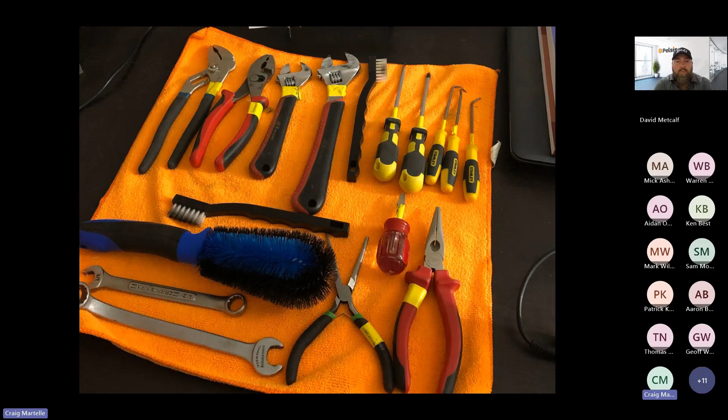It sounds kind of weird, but if you have somebody there and you start talking, you might lose or misplace parts and pieces, and not realize you may be putting a used piece back on there. So have them separate, put them on a towel, they're not going to roll away. When you're done, you should have no parts left on that towel. If you've got 2 or 3 springs laying there, something's not going to work right for you because you forgot to put them back in. So please make sure that you use a towel and put all your parts on there.

When you are cleaning your equipment and doing any mechanical work, please make sure you're wearing gloves. With having the gloves on, as any label will tell you, when you are operating equipment you need to be wearing gloves for application. That goes for doing chemical tank repairs too, because you're going to be touching parts that do have chemical on them.

Routine care and maintenance: don't leave insecticide in the tank for any long period of time. What's a long period of time? Believe it or not, just a weekend. Think about the chemical you're putting in there. What are you doing when you put chemical in with the water? You're creating a suspension. That chemical wants to adhere to the walls and to the voids and wait for the water to evaporate, so that your chemical is doing its job, waiting for the pest to come across it, walk through it, get a lethal dose, and die.

It will actually start separating, going to the walls of the sprayer the same way. And if you don't keep the chemical agitated in there, you could wind up having it get really solid and crystallize along the walls. That's going to create problems for you, because once it goes to a crystallized mode, it will not go back into solution. So if it breaks apart, it's going to get sucked up into the siphon tube, which will create problems getting the chemical to come out and work well for you.

If you're going to be changing your insecticides, of course you rinse your tank thoroughly between insecticide formulations so you're not doing any cross-contamination.

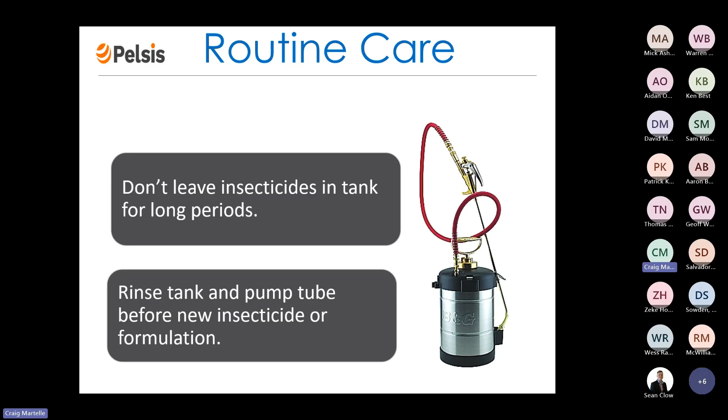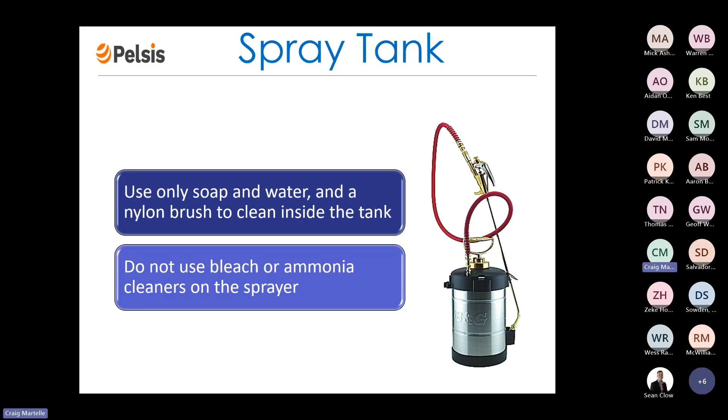Only use soap and water and a nylon brush to clean the inside of the tank, and there's good reason for that. If you use bleach or ammonia, bleach will actually etch the surface of the stainless steel sprayer, and ammonia will react against the brass parts over time, creating problems with those parts. So you'd want to keep those parts working properly—lukewarm water and a little bit of dish soap will work exceptionally well for you.

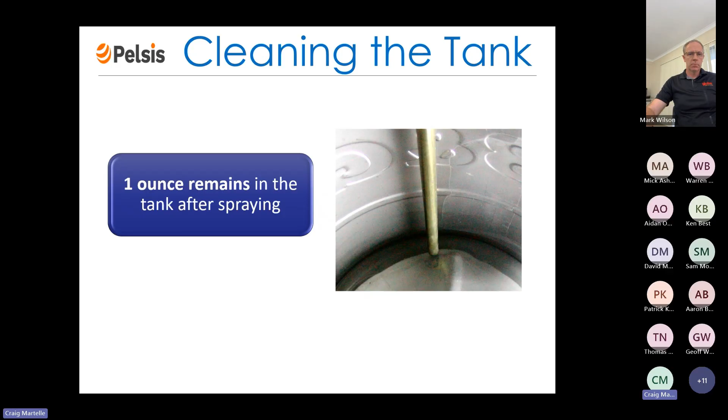When you clean the bottom of your sprayer, you're going to wind up with some water in that corner. What you want to do is have the proper brush to get in there to make sure you get all the particles out of those corners or that edge around the bottom of the tank. A long wire handle, but plastic or poly bristled brush is great. The reason I like to have the metal handles...

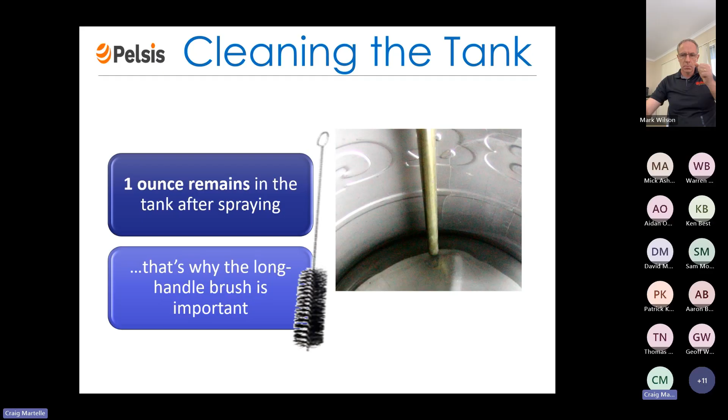When you're in there cleaning around the bottom, what you want to do first and foremost is make sure you don't go too hard against the siphon tube. If you do, you could bend it. One of two things will happen: one, you won't be able to get all the chemical solution out of the tank, it'll raise it up too far and you'll have too much sitting on the bottom. Two, you could crack the top of the siphon tube, and if the crack is big enough, it's just going to suck air out of the top of the tank instead of taking up the whole solution. So you'll have to take it apart, rebuild it, get that siphon tube out, and put a correct one in. That will help it work for you.

Once you have mixed your chemical in there, what do we normally do? We take the sprayer and shake it. Well, we're actually creating a little bit of foam on the top, and that foam starts adhering to the underside of the top of the tank. If we don't get that cleaned off, it'll start drying there and crystallizing. Over time, that crystallized material will start breaking off and fall to the bottom of the tank. What'll happen is it gets stuck in the siphon tube, or as it's going through, it'll start clogging your filter at the handle. So make sure you're properly cleaning the bottom of the tank as well as the underside of the top, and that will work exceptionally well for you.

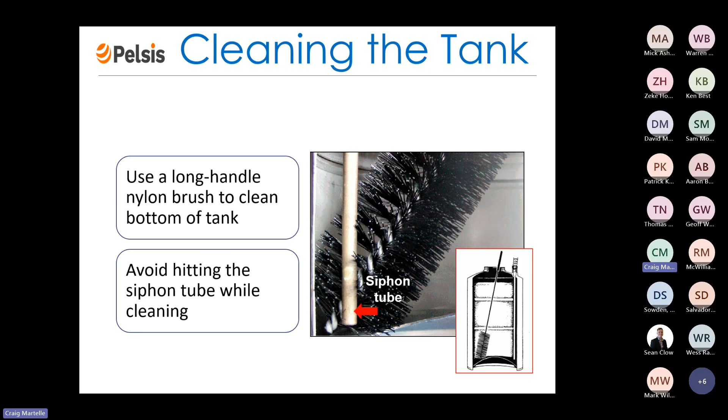But again, please avoid hitting the siphon tube, because you do not want to crack the top of that and have a problem.

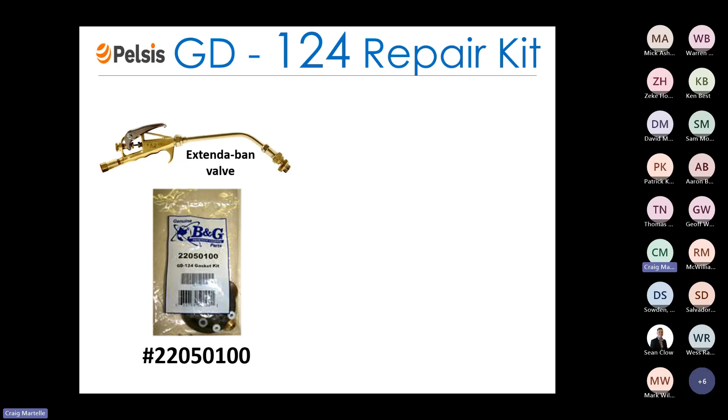Now, we do have a kit here for the full extension handle. I understand most of you don't use the cable inside, but we do have a kit available that has the parts inside that make it work well for you.

Now, with these parts, a couple of items: the springs are something that's kind of important. You want to make sure you keep those springs updated and working very well for you. You need to repair your kit about twice a year if you're using a lot of chemical, but I recommend a minimum of once a year. When you take the used spring out and put it next to a brand new one, you'll notice the new one is about a third taller. There's a lot of pressure that causes it to start shrinking down, and it will lose the spring aspect and become less effective, so it won't shut off on a regular basis.

But your soft seat gasket needs to be checked on a regular basis. Your check valve, your pump tube, the packing washers—they start leaking, you've got to replace all of them. We're going to talk about that as we go forward here.

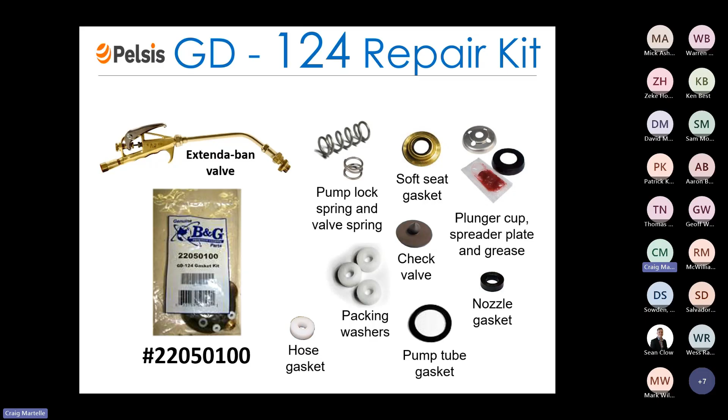On your pumping mechanism, the pump gasket is at the top of the tube. That holds the pressure in the tank itself. It's a very simple seal. All you need to do when you put that top on is get it snugged and tighten it just a hair—you don't keep turning it forever. If you do, you're going to start causing damage to the gasket. It's either going to crush it too thin so it won't hold air at some point, or, since it's a layered type gasket, if you go too far you could kink it and create a void, so it won't hold all the air pressure and it'll cause you a problem down the road.

Your check valve is at the bottom—you need to check that quite often. There's a very small hole at the top of the pump handle right in here, an air hole that allows excess air to get down in.

If you happen to have any small particles in the area, they could go down through, get past the plunger cup, and wind up stuck in this gasket. So make sure that you check that in the bottom and make sure that check valve is perfectly smooth. If there happens to be something there, very carefully peel it down, take that whatever material is stuck in there, and it should seal right back up for you.

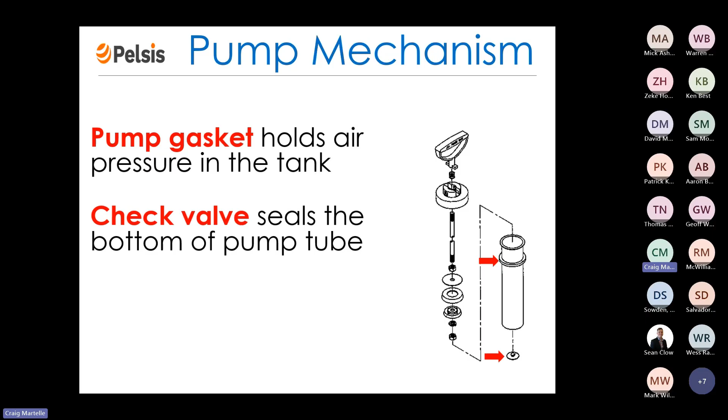But be very careful, because the brass on the bottom is very soft metal. Don't get in there with a hard piece of metal and start digging around.

Strokes of the plunger cup, they are constantly going around, so you have to check that on a regular basis as well. Make sure that you have no problems with it. If it starts to get dry, put a little bit of grease on there. Now, when you do get your kit, there is a little package of grease that's in there. There's enough grease to grease that plunger cup at least twice, maybe even three times. So make sure that you have the proper material there, so you can get the right amount of grease in there. It's going to hold air and allow that to slide up and down with ease. You just want to make sure that you're taking care of it properly.

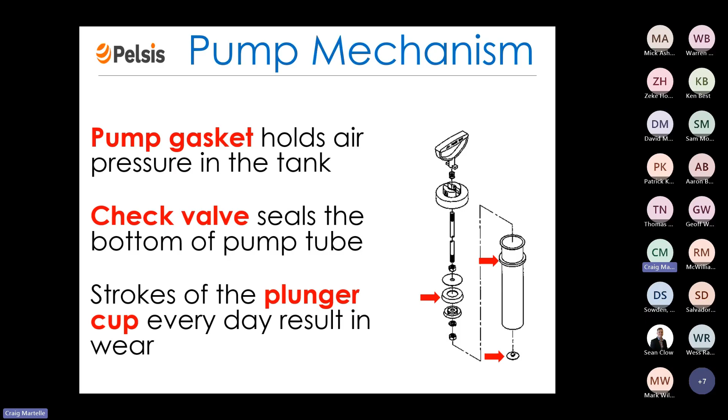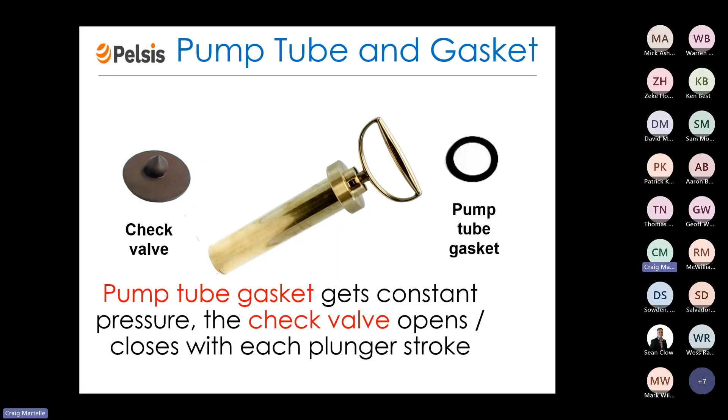Pump gasket, check valve. They are used all the time as you're opening and closing the pump tube. You're causing some pressure onto that pump tube gasket, but then the check valve, every time you're pumping, you're causing an action there. That action is wearing it out, and over time it will wear down the check valve, and you want to keep a good eye on it to make sure that it's not cupping the wrong direction. And if it starts to cup the other direction, you want to replace it as soon as you can.

If you start having some little issues, or you're losing a little bit of air pressure, and you've already changed your gaskets on the top of the plunger tube, take it out, go in the sunshine, and slowly turn that tube. You'll find a very fine hairline crack very, very quickly in the sunshine. And if that is the case, just replace the plunger tube. Now, we do make a stainless steel one. If you're concerned about it happening again, just replace it with a stainless steel plunger tube, and that'll take care of that issue.

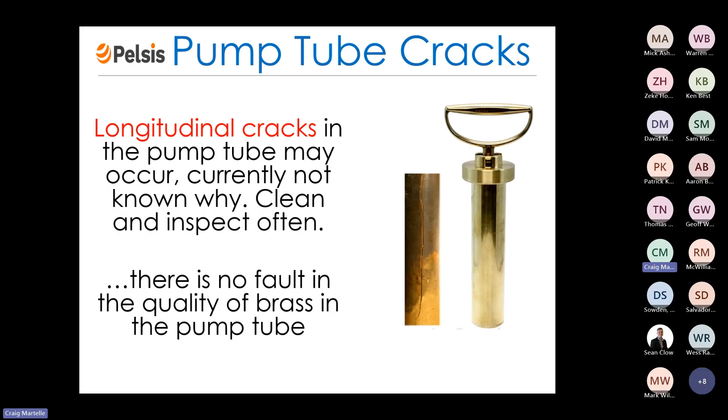The plunger tube, the brass tubes are made with the same material. That's the recipe we've used forever since this unit has been manufactured. It is a chemical resistant brass, and it holds up against solvents and insecticides.

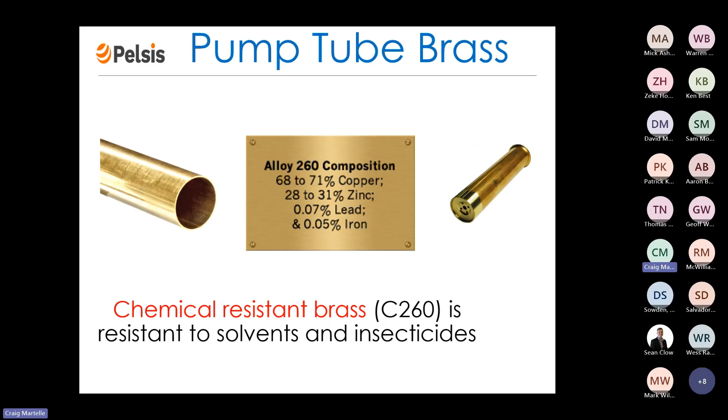Replace your pump tube gasket when it's cracked or swollen. And if you look at it closely, it's kind of porous in there. And if you really tighten it too hard, you will create that to move, and it'll create a little bit of a kink, and it'll raise or lower parts of that, and it will create a situation where it's not going to seal up that air from getting in or out. So you want to make sure you keep this looking very well. And if it starts to swell up for any reason, replace it immediately.

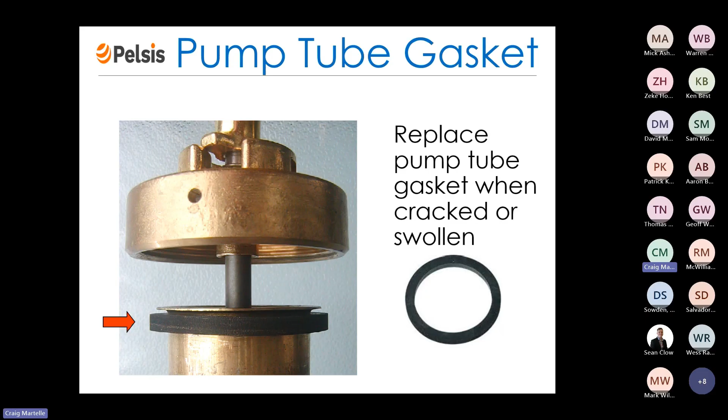Check valve. Check valve is a neat little piece. It is not the easiest thing in the world to get back on, but you can get it back on. It takes a little bit of pressure to go on there, but I want to really stress one thing here.

How that tube is manufactured, that bottom plate is pushed into the tube and it's brazed together. If you happen to catch the edge of that plunger tube on the edge of a tailgate of a truck or the side of a van door as you're trying to do your chemical, if you hit it too hard, you could actually cause the braze along that area to crack. And if that does crack, you could at some point have leakage of liquid getting back into the plunger tube, and then hence giving you some problems with chemical coming out the top.

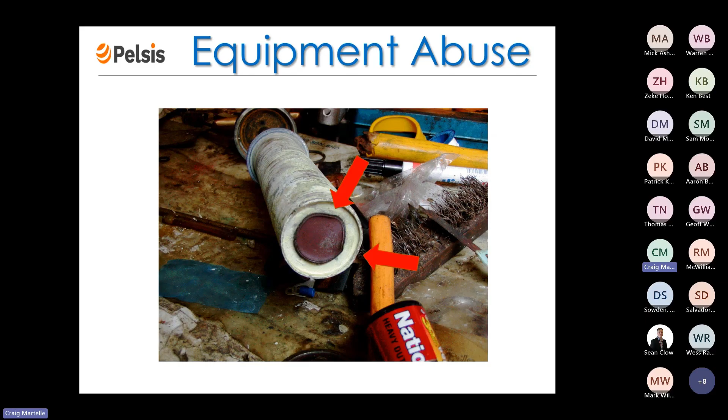But if you look carefully on the underside of the cap, where the handle is, there's rusting, surface rust that is built up in there. That will sometimes break off and go down through the plunger cup and come out the bottom and get stuck in the bottom seal. What you want to try to do is look at it every time you're in there. Always clean that down. Just brush it down, and what it does is take any extra particles that are there and cleans them off. That is part of the cleaning and maintenance that you need to do on a regular basis. So please, when you clean it, clean the underside of that, and it'll work out very well for you.

The plunger cup, technically you can replace it every 2 years, but if you happen to get the kit that we put together - I believe the folks, Mark, you said you folks had a kit that you're putting together - if this is in there and it's got the cup and it's got the pressure plate in there, if you're taking that all apart, don't put the used one back on. The new one's there, just put it back on. But what you want to do is take like a Ziploc baggie and put the plunger cup and that plate in it.

Date it, and put it in the glove box of your vehicle. This way, if it's got a little bit of grease on there, it's in a sealed bag, it'll still be protected. That way, if you happen to take this apart and you're out in the field working somewhere, and for some reason you happen to drop this and it cracks that plunger cup, you'll have one in the vehicle that can get you through the rest of the day. Otherwise, depending on how far you are from the office, you might be done for the day. You don't want to do that.

So just keep one in the glove box, and every time you replenish the one that's in the tube, take out the one in the glove box, throw it out, put the one that you just replaced into another baggie and put it in the glove box. That should help out with any type of field repairs you need to do.

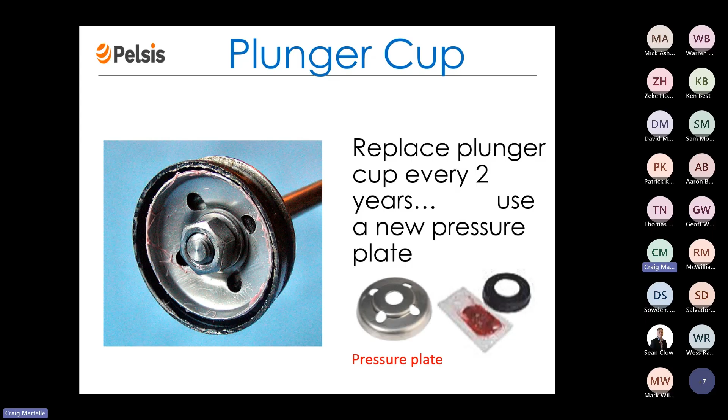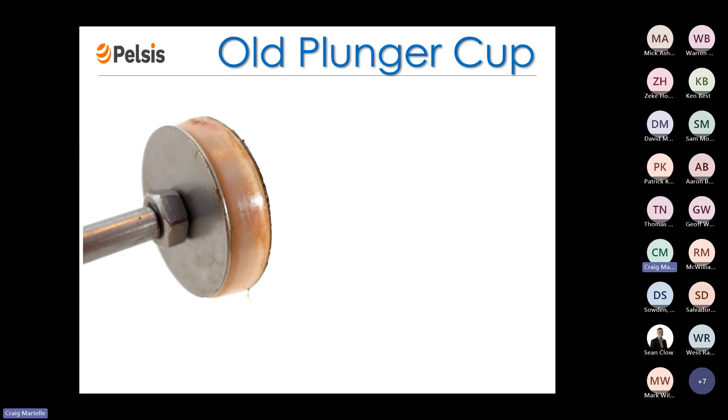If you happen to have an older unit and it has this semi-transparent plunger cup, please throw it out, get a new one. We haven't had those in like 9 or 10 years. And if they are working, they're probably not working very well. You're pumping like mad, just not getting a lot of really good pressure. That's part of the issue that you have there.

Replace the pump lock spring. Now, how do you tell if that's giving you a problem? If you have that locked in place and you're going around spraying and you happen to catch a piece of a rack or something in a warehouse, and all of a sudden your spray tank just drops to the end of that rod real fast, well, that's telling you that spring is not working properly. You need to replace it. It's just lost its spring. It's just been crushed down too much.

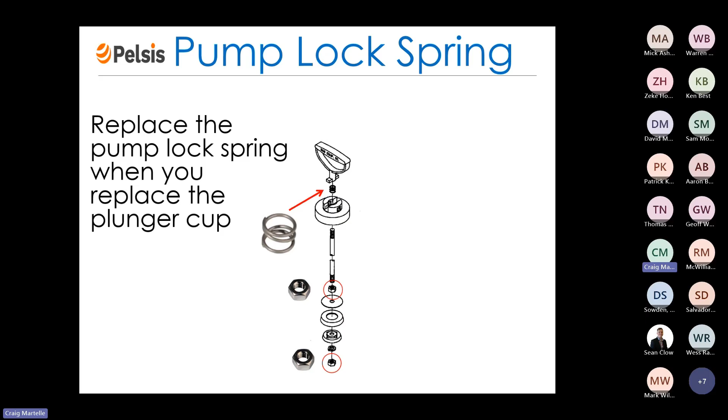So what you do to replace it is you take the bottom nut off, take the cup plate off, the plunger cup, and as you're going up through, take the top nut off. This will all slide straight up. Take the old spring off, put the new one on, and reverse what you've done. Put the top nut on, then put a new plunger cup and plunger plate on there, and tighten everything back down. You're good to go.

Now the tube that comes with that of grease, grease it up to make sure it's going to work well for you. Just run it around the inside of the top of the tube, and that'll give you enough grease. There's enough in that tube to grease it at least twice, as I said, so don't throw that out or throw it all in there at one time. You'll just wind up with a whole bunch of a glop mess at the bottom of the tube, and it's just not helping you out.

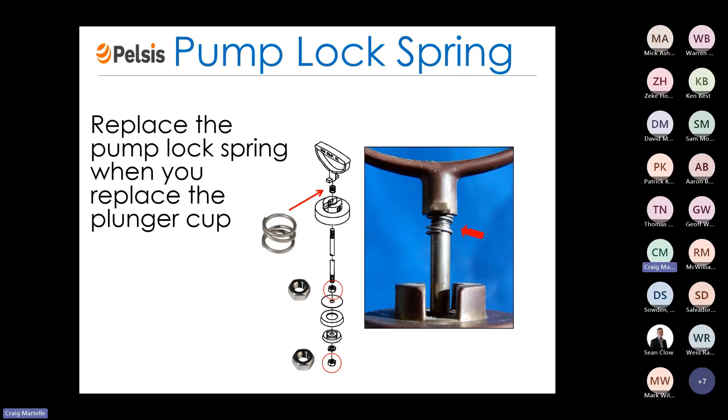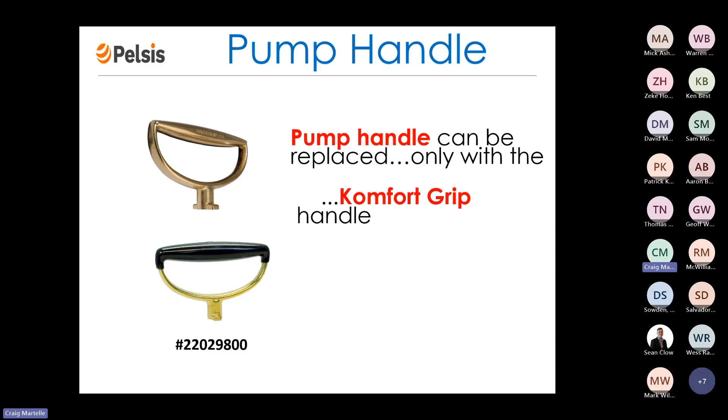If you happen to break the handle, we do replace it. It does come as a Komfort Grip handle on the replacement. But occasionally you may need to replace it. If you do, just order it, get it replaced, and move forward.

But your tank hose, this is one area that unfortunately I see a lot of folks that just don't take the proper time to repair or replace. If your hose happens to have any type of a crack, or if it's damaged, or if the outer casing is just that worn, you're starting to see the corded thread underneath, please replace it.

Because as you pump that up, when it's fully pumped up, you've got around 30, 35 PSI in there. If that hose happens to break on you, how fast can you take that pressure off? And if it's not that quick and you're on somebody's hardwood floor over top of an oriental rug and it soaks it, you've now got a contaminated surface you're going to have to deal with. So check it on a regular basis, and if you need to, please just change it.

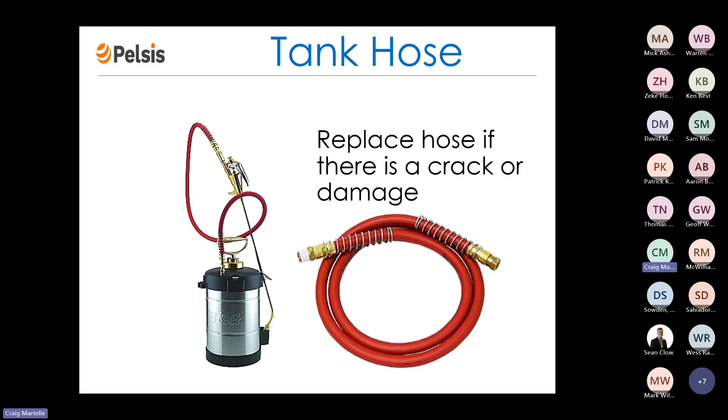If you're using a no extension or a 9-inch extension, you're going to have some extra hose. Just coil it around the top of the handle as you have it in the back of your vehicle. That way, if there's anything in there that happens to be rattling around, it's not going to go against the hose against the side of the tank and create some type of a fracture or crack in it.

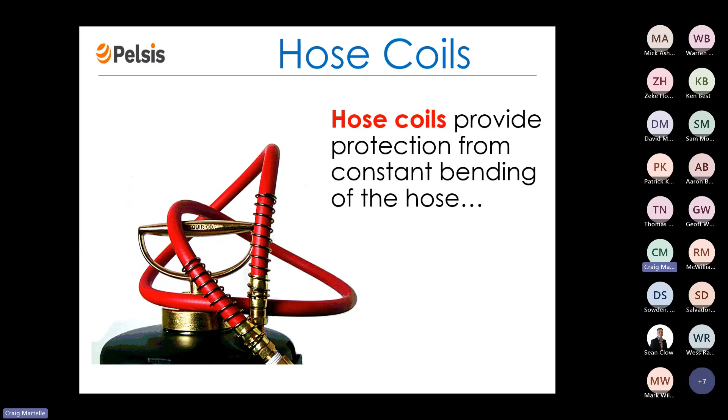Or better yet, if you happen to have a 5-gallon pail, just put your sprayer in that pail. That way, if there is something that does leak, it'll leak into the bucket, not all over the back of the truck or out on the ground. It's the last thing you need to have happen.

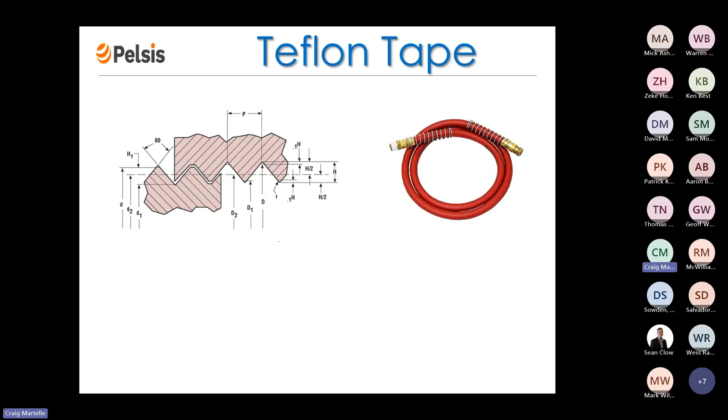When you do replace it, make sure you use Teflon tape. That will take up the little bit of room that's in the threads. Brass is a good material. It is a little softer. It does move, but it could create a void in there. So a little bit of thread tape will help take up any of that area.

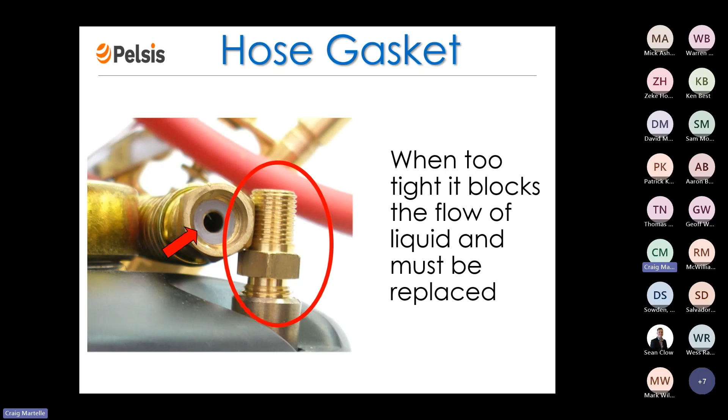When it comes time to replace the gasket that's at the bottom of the hose, yes, there is one there. Yes, it does need to be replaced. You need to take that double male studded thread and use 2 wrenches on that and the hose, or you're going to create a problem.

You put a wrench at the bottom where the red circle is. While you're holding that in place, the wrench on the top for the hose, you crank it to your hand, and that's how you tighten it down. How tight do you make it?

When that hose is out, you think that's a swivel piece that's on there. Technically, it's swiveled there, but it is not supposed to swivel. Once you tighten it down, it completes the connection and holds it tight in place. You tighten it just enough to where you can't turn that hose. You are now tight enough.

Don't go any tighter. Now, if you only use 1 wrench there, what's going to happen as you're tightening the hose, that stud is going to slowly turn a little bit each time you turn the hose. Eventually, you'll start stripping out the brass threads on the steel, and/or you will shear off the siphon tube. You'll all of a sudden hear a clink inside the tank. And if that happens, well, you just over-tightened it. Now you've got to go get a siphon tube and put it in.

Please use a second wrench, put it on the base or on that double male stud, hold it tight and tighten to the wrench or break away from the wrench. That is the way to make this work without causing any further damage.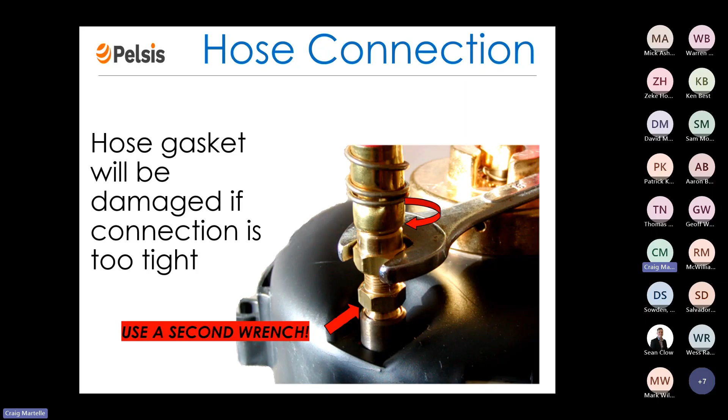When it comes time to check your screens, and hopefully you're checking them on a regular basis, if you're using wettable powder, I recommend that you check them at the end of every day. If you're using an EC, once a week. You just want to make sure there's nothing building up in there.

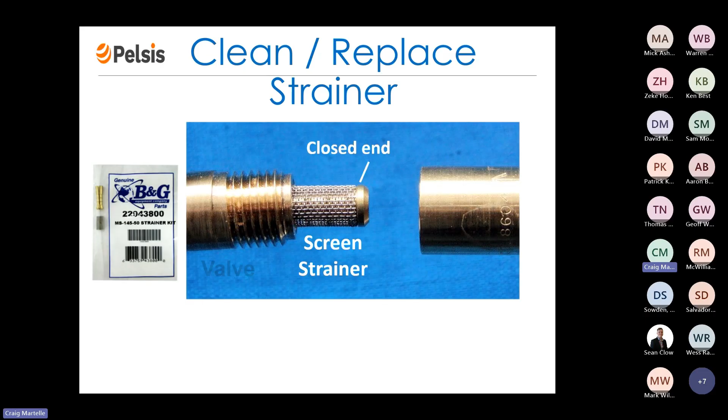But when you do put it on there, there's the closed end that needs to go towards the hose. Now it is beveled as material comes down through. Sometimes you have, looks like frog's eggs. Sometimes it'll start solidifying, and as that hits that beveled top, it breaks it up and it goes through the screen.

It comes out the end. Now, if you happen to turn it the other way and put the closed end in towards the valve, you've got it pumped up and you squeeze the handle, it's just going to shove that into the handle. It's going to shut off your flow, and you'll need needle nose pliers to make sure you can get it out. But it will stick it right up in the handle.

I've been doing pest control 40 years. I did a rebuild class about a month ago. So if you're talking with somebody, it's very easy to switch that the wrong direction. You just got to make sure you have the proper tools so you can get it out so you don't cause further damage.

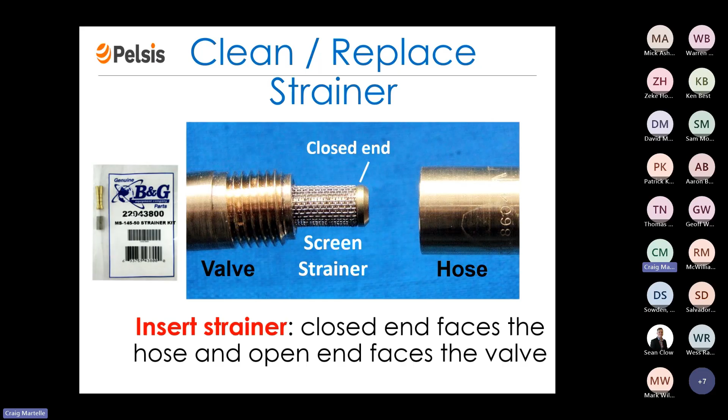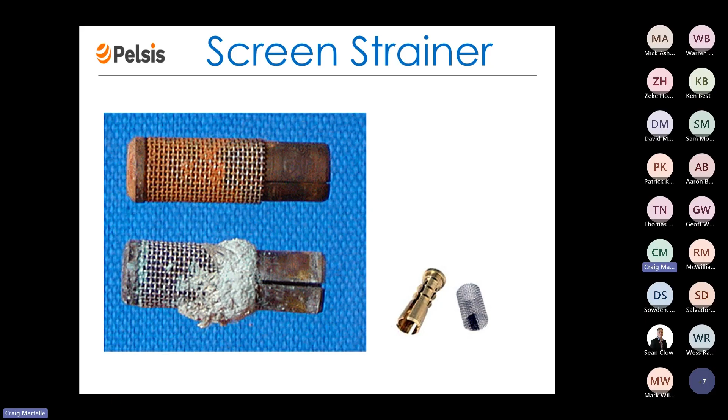On the one on the top, just clean it, and if you need to, there are parts available. Replace it as needed. But please don't take it out and just go without it. What'll happen is you'll start clogging the tips very quickly. That screen is there to make sure that you don't clog your tips.

When you do clean it, please use a nylon bristled brush. Now, some of you are using the full length with a cable in it, but I believe most of you are not. So in the handle, we're going to talk about the parts that are here in this handle, and then the parts that shut off in the end.

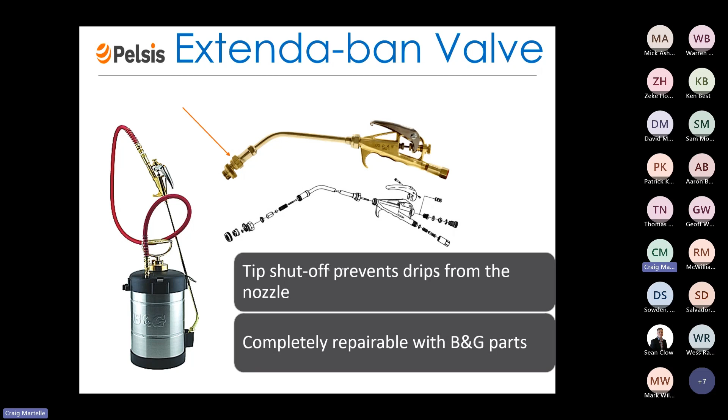And then I'm going to show you the handle that you folks are using, so there is a difference. We just want you to understand it. If you happen to have a little bit of leaking and your gloves are getting wet, that stainless steel nut there, only turn it a quarter turn to shut off the leaking. If it still continues to leak, stop at that point. Something's not right. You want to take it apart.

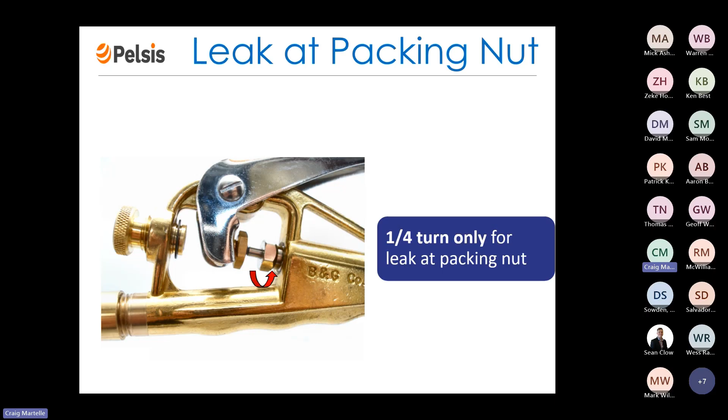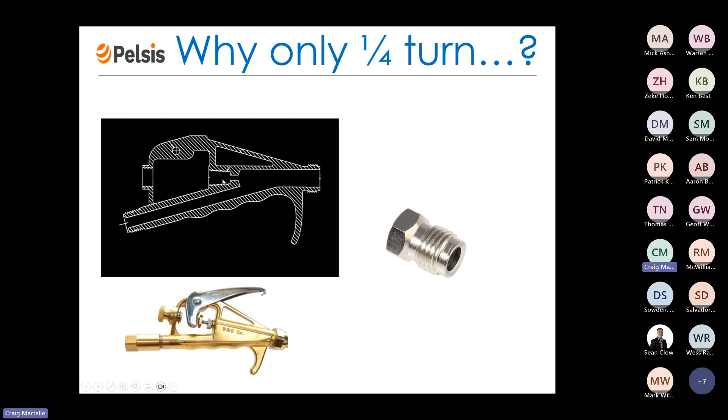But on the stainless nut here, as it's going into this, you're going to have your 3 gaskets in there. And as you're tightening, you're going to create pressure. It's going to start shutting it off. But if you go too hard, you could possibly snap the brass up in here, and it's going to cause this to strip out. At that point, you've got to buy a whole new handle, and that's not a cheap handle. So you want to make sure that you are doing it properly.

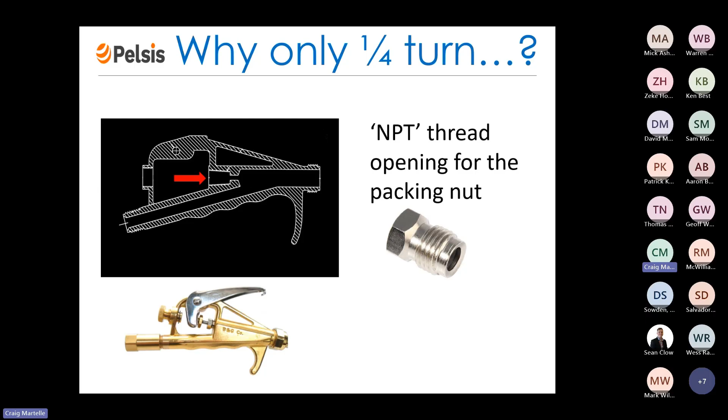Now, the packing washers that we're looking at look like beveled donuts. Well, they're designed that way because as you're going in, they're going to start flattening out. And as it flattens out, those bevels will go outward and create the seal in the walls of the handle itself. There is a point that if you keep turning - this is why we say only go a quarter of a turn once you get the initial pressure on it and it's working.

If you keep going, there is a finite aspect of these. Once these bevels go totally flat, there is no place for these sidewalls to go. So what will happen is the interior part could fracture and it'll lock onto that metal shaft. And once it locks onto that shaft, it is extremely difficult to get that out and try to replace it.

If you're using a cable, you may have to replace the cable. It'll be a lot easier. On the other handle, and I'll show you in a moment, there's just a solid rod in there. You might be able to get those to come off of the solid rod.

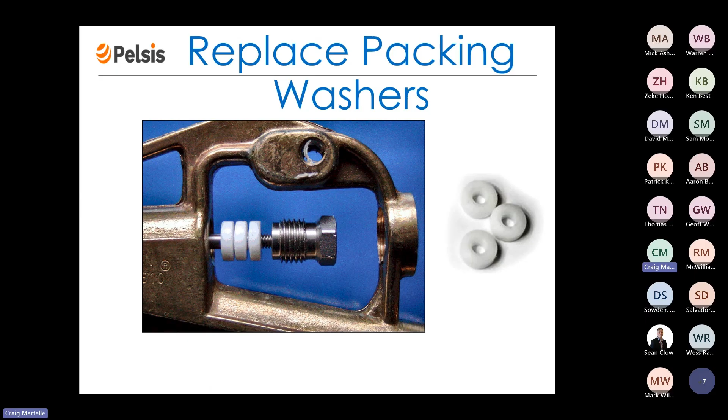When it comes time to take these out, the first one, you can take a screwdriver, whether it be a flathead or a Phillips head, just get in there, get into the plastic a little bit, and just unscrew it. It'll come right out. The second one, the same way. The third one, you want to make sure you're not hitting the brass at the bottom. So if it's not working, this is where you'd find those three little picks I told you about. Just get one that's going to work well for you and go around and take it off.

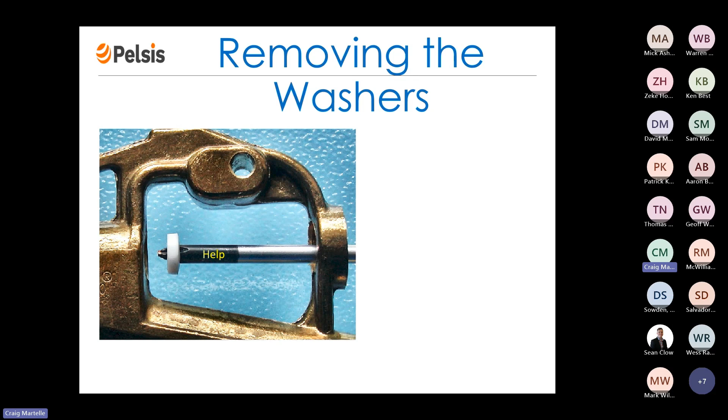Now, this will be the one piece that's going to test your patience a little bit. It's either going to come out fairly easy and relatively quick, or it's going to be in there for a while and you're going to have to really work at it to get it out. But that will be the one part that'll be kind of challenging for you, so just be prepared that you might run into that.

At the end of the tip, where the spray tip is, you've got the nozzle gasket. Now, when you go to change your tip or clean it out, what happens to that little tip gasket? That thing just falls off, it vaporizes. I don't think it ever hits the ground - it gets wings and just disappears.

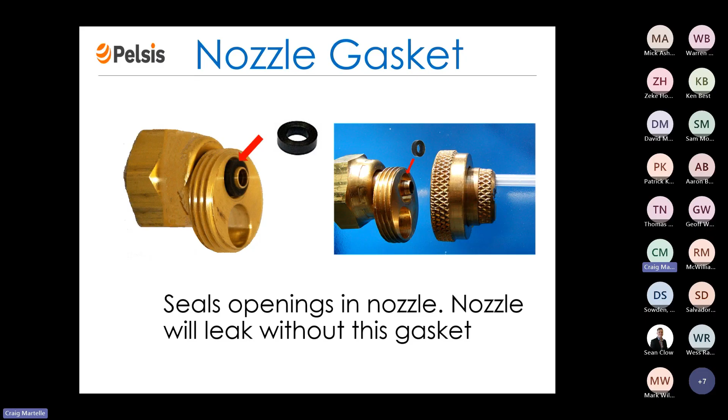What you want to make sure is you have one or two in a glove box in a Ziploc bag, so you know where to have them and where they're at. If you happen to lose one in the field, you can't spray without it. So you want to make sure that you are properly putting another one in there. It's going to lock in place correctly and give you a good seal. But please make sure that you are careful when you do take it out.

Now, the flat side of the gasket - when you take this apart, if you're using the full length with the cable, there's a lot of pressure on that. When it comes time to take this off, use two wrenches on the end because we've put a little bit of pressure on there when we bent that. You don't want to cause that to fracture. You put one on here and you break or loosen from here.

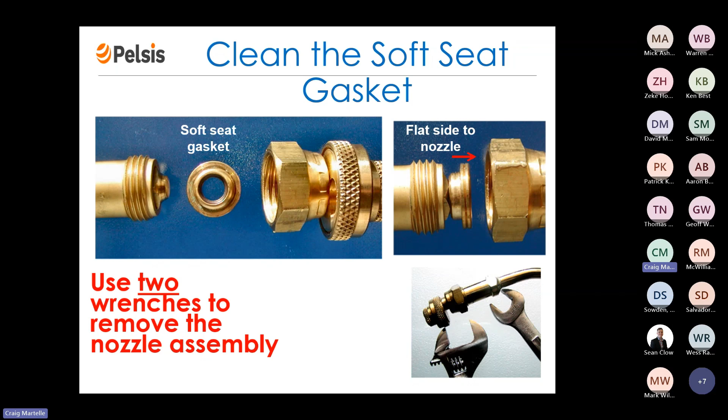Then when you take it apart, the gasket - the soft seat gasket - you take it out and look at it. If need be, you replace it. And then make sure you have the flat side towards the tip. Same goes for the one without the cable in there. Same concept: that tip comes off, soft seat gasket comes out, it goes against that beveled nut. You just want to put it back to where the seal is against the bevel nut, and that'll work very fine going back together for you.

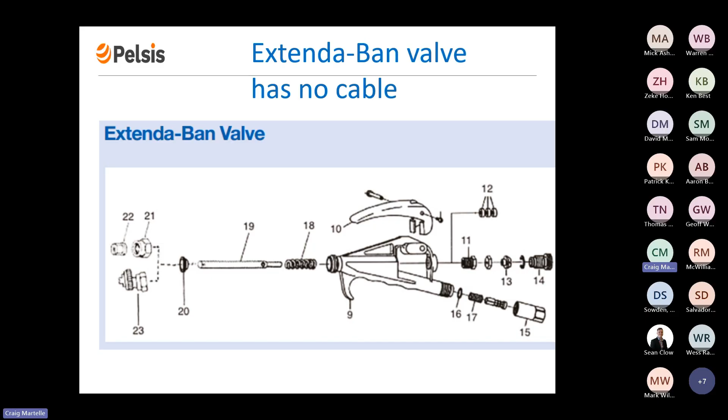But same concept: once you take it apart, it's easy to clean, easy to take care of, easy to put back together. Just do your due diligence, go through, clean it appropriately, and take care of it, and it will last you a long time.

On the end, I'll go over this quick because a few of you do use this. The valve spring is on the end of it, not in the handle. This is where it would be on the other end.

What you'd want to do is take the lock nut number 1 out and the seat stem number 2. When that comes off, take the spring out, put the new spring in, put the lock nut back on, put the soft seat stem back on.

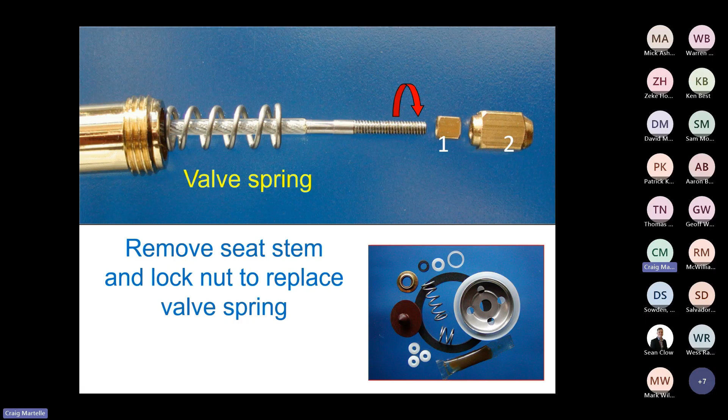But when you put it back on, if you have the brass nut, you need to leave 4 threads. If you only leave 3, when you start to pump it up, that soft seat stem's not long enough at that point, there's not enough pressure to shut it off with a gasket. If you have 5 or 6 threads, it's too long and you can't pull it off, and it's not going to open up and release.

On the other end, when it's just the handle part, you don't have this kind of issue to deal with. So just make sure it's in the same place when you replace it as you had taken it apart, and it'll work fine for you.

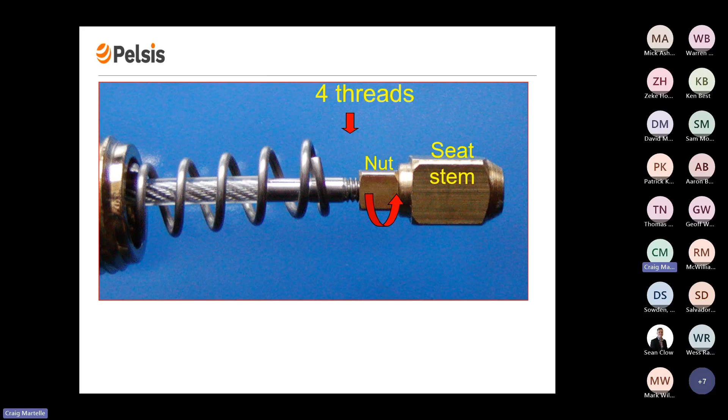Maintenance schedule, I can't tell you what to do with that. You folks have your own routes, your own area, what kind of work you do. You work with your supervisors. That's between the technician and the supervisor.

Basic recommendation, minimum once a year. If you're doing a lot of spraying, twice a year. But I understand that you guys are just coming off your season, you're getting ready for the downtime of year.

Now's the time to go through, clean them up, get some tags. If you carry 2 or 3 sprayers, but during the winter you only need 1, then take the other 2 out of service, clean them, replace them, repair them, and then put a tag on it, the date, who's there, who did the work, and then it's ready to go back out. That way you know it's all done. You just go back to season, put a little water in it, test it, and just move on and get back to work.

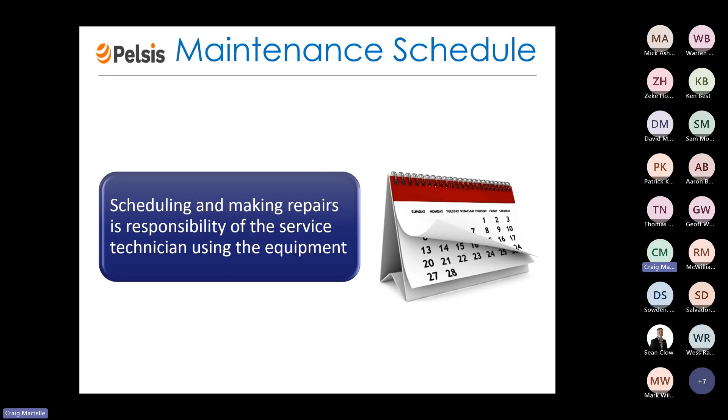But the scheduling aspect, that is up to you folks, because you're in different parts of the country. The northern folks are gonna have more use of that material year round, whereas the guys on the south side are gonna have less use year round. So you just have to work with how you're using your materials and take care of it.

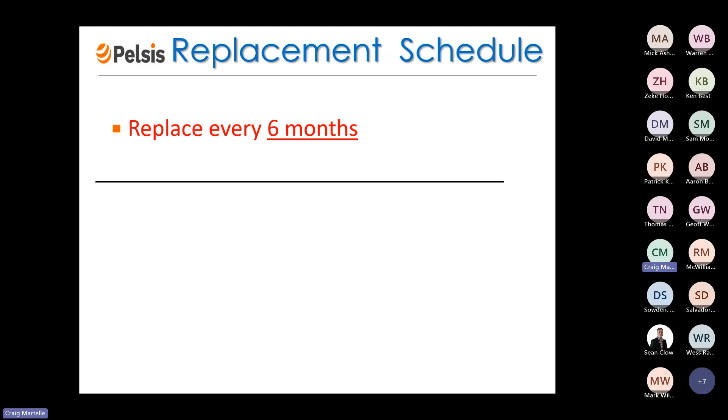Now, we've gone through some of the parts, what it takes to take this apart and put it back together. I'm gonna get into a little bit of a different aspect. I'm gonna show you why you need to do it. There is a little method behind our madness on this.

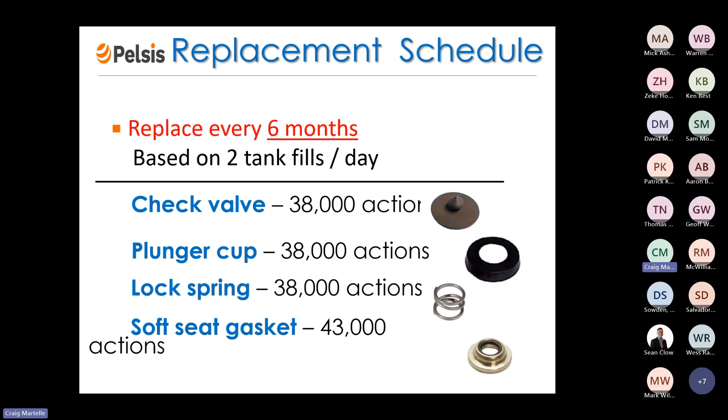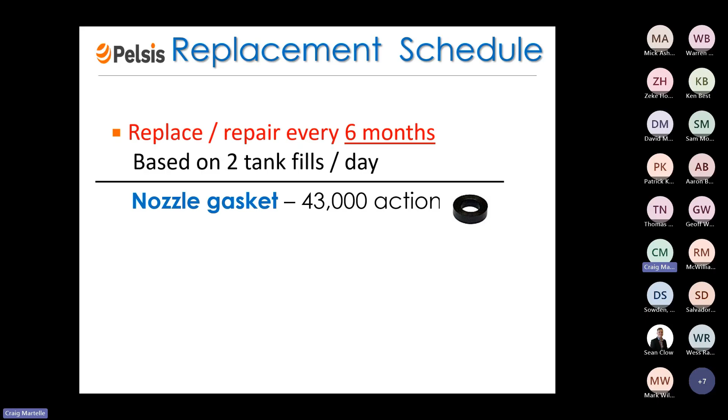These are just a few numbers that show you how much action your parts get as you're operating every day, and that's a lot of actions as you're going through there. That's just based on 2 tank fills a day. Some people may only use 1 tank or a half a tank. I have one gentleman I talked to recently that does 3 tanks a day. It just depends on the type of work you're doing.

But you are getting a lot of material that's in there, your nozzle. Think of 350 gallons, that's kind of an important number. And as I go through, I'll explain it a little bit better.

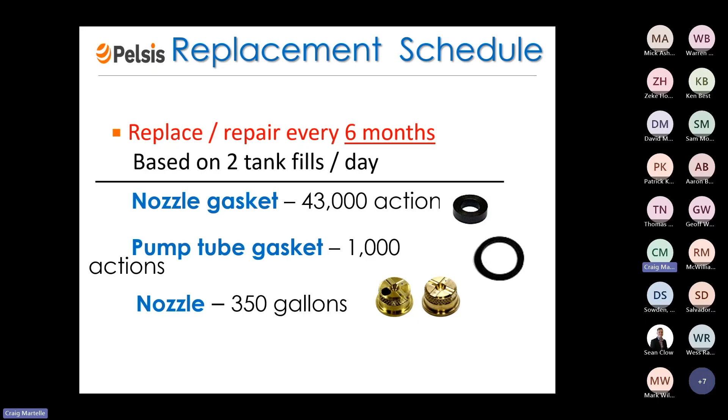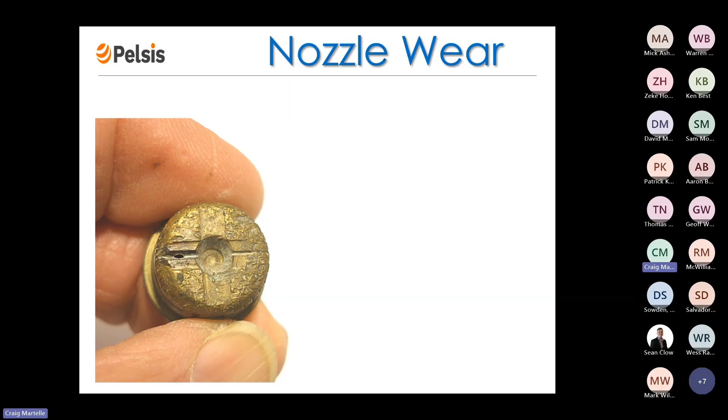We had done some work with Virginia Tech, and what they had done is taken tips that were used from 3 months to 36 months, and they brought them back and just wanted to do a test on it.

Think about it, there's nothing with greater force than water itself, unless it's frozen. With brass, if you're running 350 gallons of water through a tip, that tip has expanded by 10%. That 10% of the opening has just washed away because it's a soft metal, and it'll expand as time goes on. But with these tips, averaged out, there was an average increase of flow of 14%.

If you're mixing chemical for an application, let's say treating for fleas, you have to use so much chemical per 1,000 square foot. While you're squeezing, you think you've done it properly, but in actuality you've added 14% more material out there than you needed to.

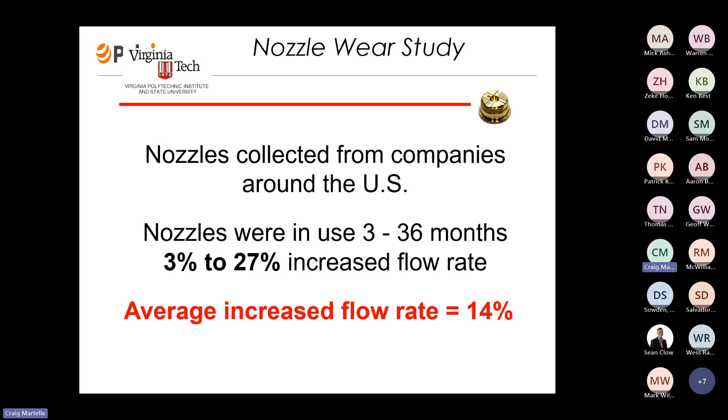For flow, just to give you a quick idea how we came up with this: on a fan, coarse fan spray, it'll increase by about 10% from normal use. That's an additional 1.7 ounces per minute of spray time.

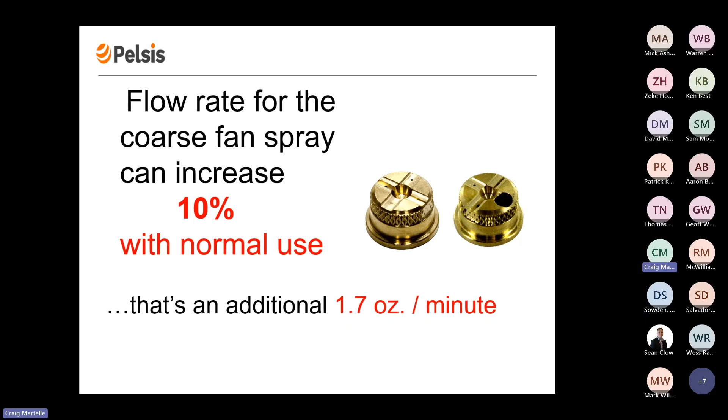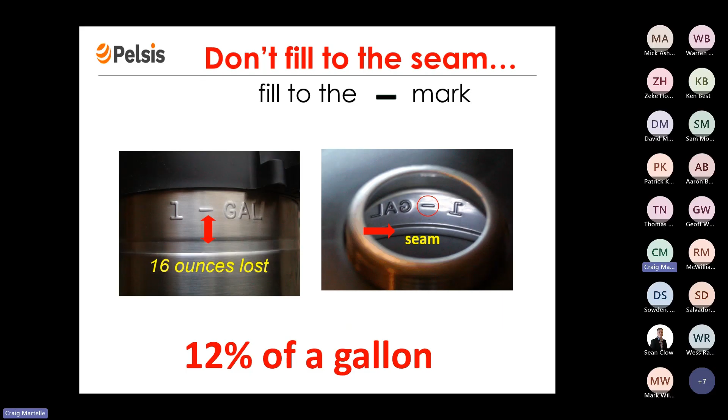Consider something hypothetical. First, if you're filling your tanks, those little dashes on your tank show exactly where your full tank is, so make sure you're using that appropriately. Just to throw this out there, if you have 8 accounts and you're spraying an extra 30 seconds at each account, that'll result in approximately a half a gallon of insecticide every day that you're over applying.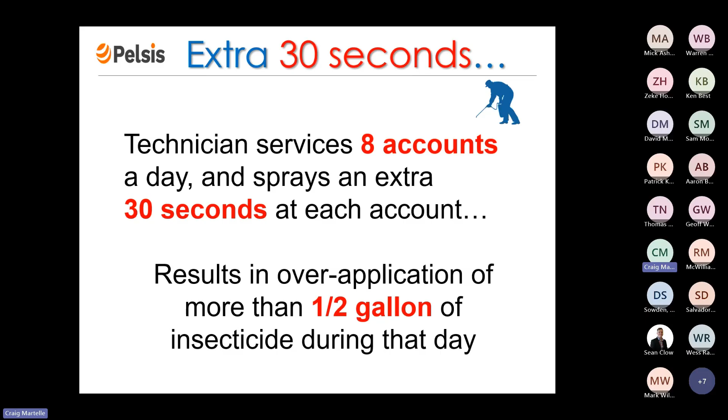I'll do a little math on that. At 17 ounces, it comes out to 68 ounces, we'll drop it back to 64 for quick math. That's an additional half a gallon of spray wasted on a work day. That's 10 gallons a month, 120 gallons a year per tech, and that's just at 10%. If you continue, it will expand even more. That's an awful lot of chemical you're putting out there that you're no longer gaining your money back on, so you're just wasting chemical at that point.

So if you are doing an overlay spray on a floor or something for fleas or other pests, you may not be getting a very good pattern. You might have a lot in the middle and nothing in between, and how's that going to properly take care of the pests you're going after?

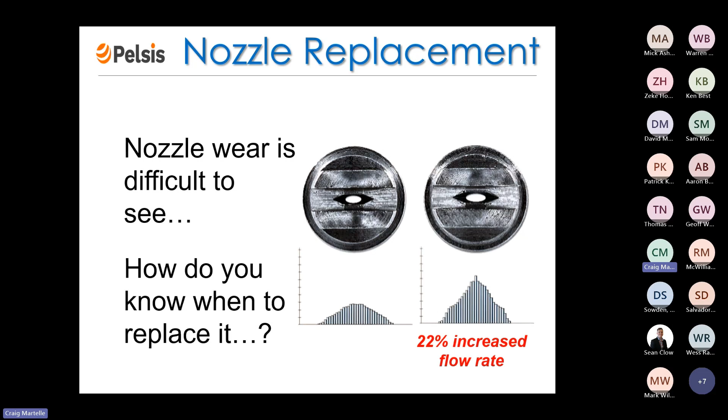It may not give you the protection you're looking to get. Just another quick example: in 64 work days, after 320 gallons, there was an increase, they wound up with an 11.8% increase. It just depends on the material that's on there and what they're using.

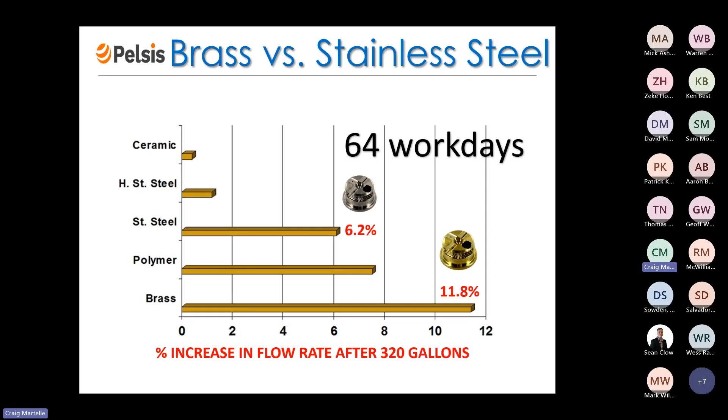You can calibrate your units. We do recommend that you calibrate it as soon as you get it, just so you understand what your flow rate is. It's easy to do, just get a graduated beaker of some type, and fill it up, either going by time or by measurement. Here we did it by measurement: it took 1 minute to get 17 ounces of material.

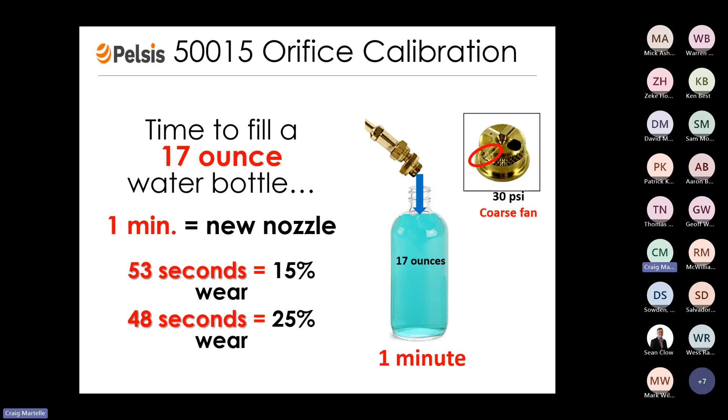If we went back 2 months later, and it took 53 seconds to get the same amount, that's a 15% wear, meaning there's excess material leaving that sprayer. 2 months after that, there's a 25% loss. So you're really starting to put an awful lot of material out there that you're just not going to gain back. Think about it if you're a company owner or a supervisor, that goes against your bottom line. That's excess chemical you're just giving away and not recouping on the backside.

So please make sure that you do calibrate appropriately. If you're going by dimensions, say 12 ounces took 45 seconds on a new tip, what you want to do is check it again after a couple of months. If it's 40 seconds, you've got 10% wear; if it's 35 seconds, that's 20%.

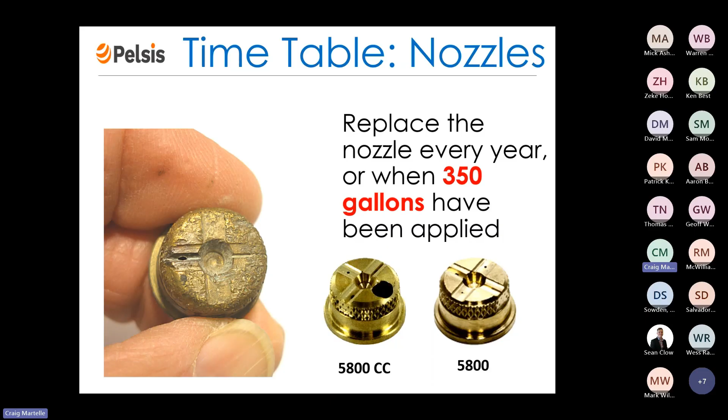So please replace it about every 350 gallons. If you're using a wettable powder, that will expand a lot faster, about 270 to 275 gallons, and you need to replace it or you're going to start wearing it out.

If you're working on your sprayer and it starts clogging, please don't go in there with a paper clip or other devices, because digging around creates a larger opening. Instead, have a soft bristle brush, tap it on the tailgate of your truck on the flat side to loosen it up, then take the soft bristle brush and clean down through it. That should help open it up and make it easier for you.

Or if you happen to have a small can of air, the kind that came out years ago to clean keyboards and stuff, they're handy to have around. A quick blast of air in there will also do the same thing.

When you do get a new sprayer from us, it does come with an instruction sheet. I recommend that you read through it. It'll give you some really neat ideas, and there's even troubleshooting ideas.

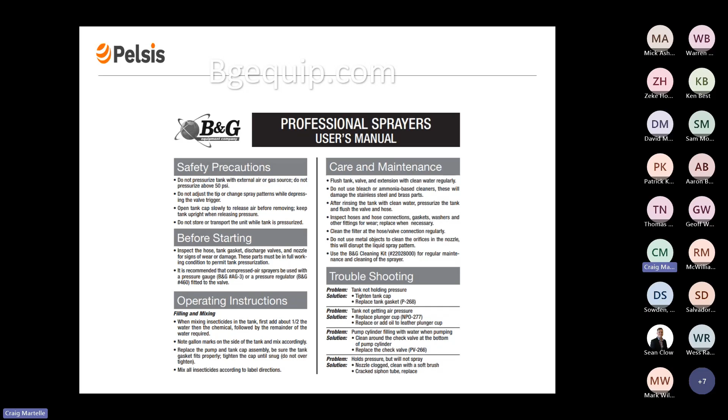Online, we do have a chart here, but Mark has a better chart that you folks are using over there, and it's an interactive one. It's a very good one.

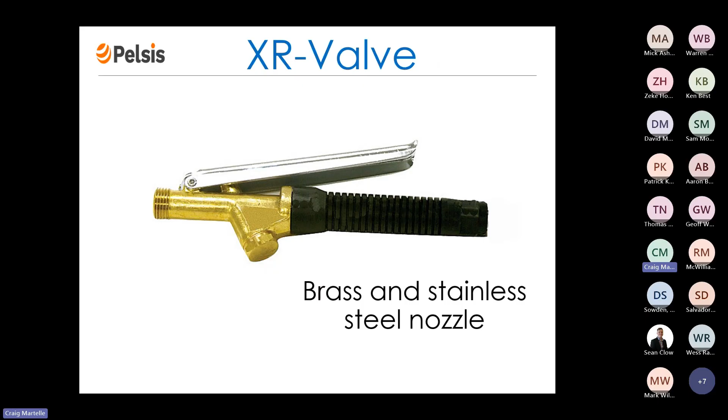If you happen to get into any of the foamers that we have, we have an XR valve, and I just want to very quickly show that to you. That will be on the Versafoamer HH, the 1 gallon foam unit. It's a very simple repair kit, just a few items in there. The handle is the actual part - that's everything. When you take that out, that's what you're going to be repairing or replacing.

The copper gasket is the one thing that is not included in the kit. Please don't lose that.

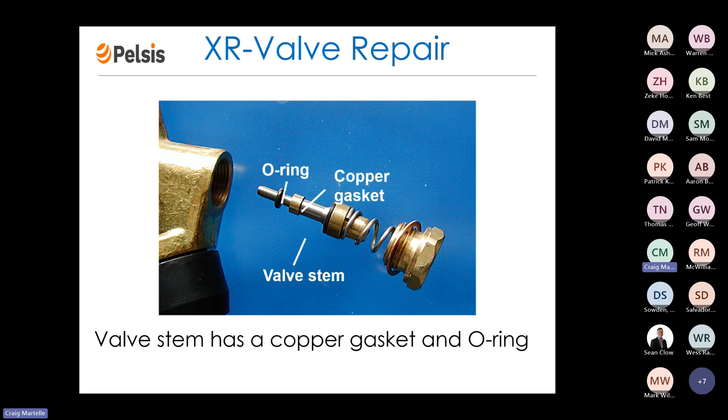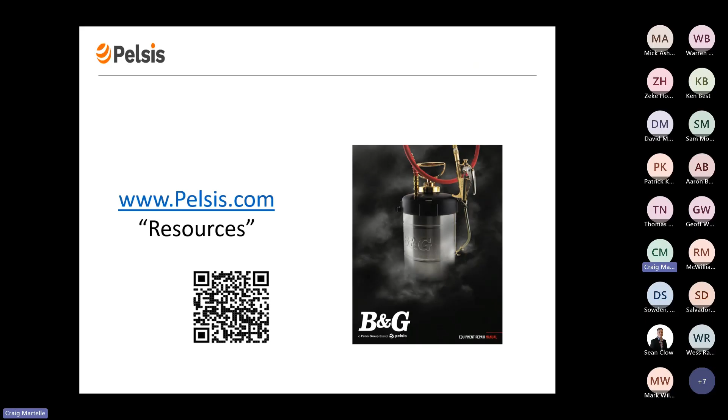And that's what we had on this end. Does anybody have any questions? Please bring it up, we'll take any questions you have, anything we can do to help. I do know Mark has some items that he can help you with when it comes to parts and pieces.

Mark, do you actually do the repairs there? I think you said you do. We do, yeah, we'll do repairs. We obviously encourage people to repair themselves, but if they don't want to, we're happy to do the repairs in the branches as well. So we do that. There's just one more thing.

Do you have any slides on the pump top, Craig? I've got something I can share if you want to talk to that. If I can share just my screen. Yes, would you please? Yep, just give me 2 seconds.

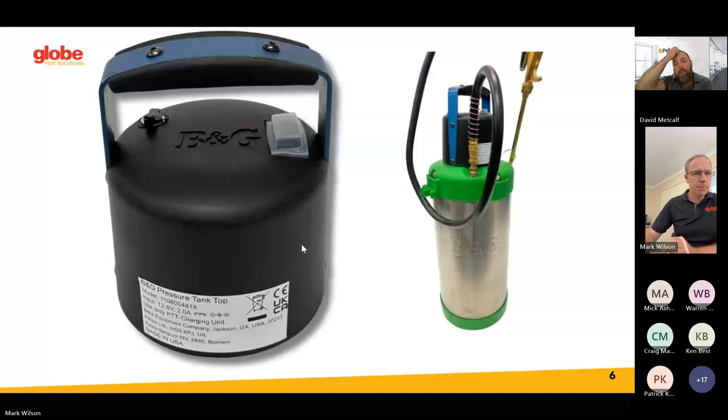So yeah, we've introduced the pump top about a year ago and they've been very successful. It's probably for us been the only piece of equipment we've ever launched that we haven't had to repair much, generally equipment we generally get back for repair. But this piece of equipment's been fantastic, we'd literally have not had any of these back. So I mean, I can talk about this unit, but you guys know it best, you developed it, so if you guys can give us a quick rundown on the pump tops.

Absolutely. The pressurized tank top that is there is designed to replace the hand pump. But please, if you do get one, keep the hand pump in a Ziploc bag in the vehicle somewhere, just in case this stops for some reason. You want to be able to keep working. But you put it on your sprayer, you turn it on.

Once you have it fully charged, it'll take about 3 minutes on the initial, once you fill the tank, to get up to pressure. It shuts off at around 31, 32 psi, and when you get down to about 24 psi, it kicks back on. So you can keep spraying and it works very well. It'll keep up - you charge it once, you should be able to get through a better part of a week at about 25 to 30 gallons on a charge.

And it does come with two chargers - there's one for the vehicle and there's one for your wall. So you can charge it at home, or you can charge it in your vehicle between stops if you have a lot of time and feel you need to.

It also comes with a little cap. So if you don't want to take the whole tank in the house, you can take the top off, put a cap on the chemical to keep it in there, take the tank inside, charge it. Just remember it the next morning. You don't want to get to the first stop and not have it.

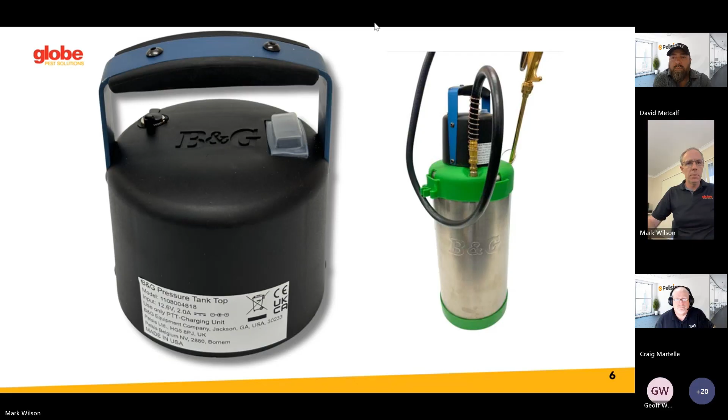Sharing. There's usually a question from someone. I must have been that good. Very comprehensive.

Is that a question or comment, Patrick? You just popped in there. I guess the one question I've got is probably to Craig - what is your tip for getting that check valve in the bottom of the plunger?

I always find that if I try to get it warmed up just a little bit, put it in a little hot water or something, like from a teapot, let it soak in that for just a little bit, and then just pop it right in. I just bend the edges a little bit and just work it in, just pop it in.

I was thinking about that yesterday because I was fighting with one yesterday afternoon, so I thought I must ask Craig how to do that. So, I'll usually push it in from the side a little bit and twist it - spin it as you go in.

If you're really good, like I have a really fine set of electronic screwdrivers, I'll take a flat blade if I don't have hot water around, feed it in, slowly work it around, and it will pop in that way. But if you're too rough or too quick, you could damage it or slice it.